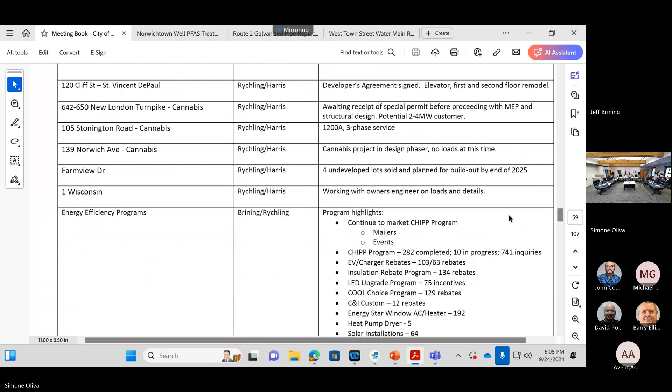Are there any questions or comments concerning the leadership team template? Second. I didn't have any real questions.

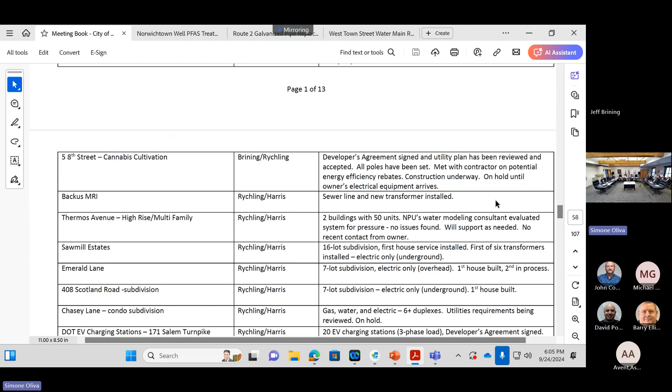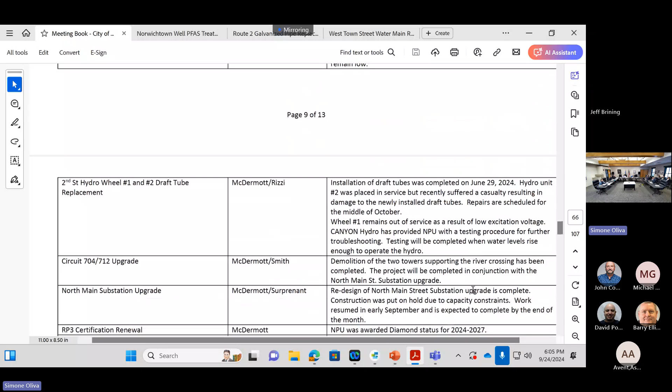I did notice that there were at least 4 or 5 listings under cannabis. Yeah, I thought we had 2 cannabis growers and 1 dispenser. It seems like now it's proliferating. Well, everybody lives on their base. So 8th Street is the one that's the front runner, and they've been waiting for some electric equipment to get started. They were supposed to be started a long time ago. 4th Street kind of went away, now they're back again. We also have somebody looking over at the Nippy's Field area, and somebody looking over at the area near across from the golf course at the driving range. And we've got somebody looking at either Stonington Road or the Aqua Industrial Center. So did you notice on, I thought that one. They're pretty much pulled out of there, but they're looking at relocating in the new business park, north, Aqua Industrial Center.

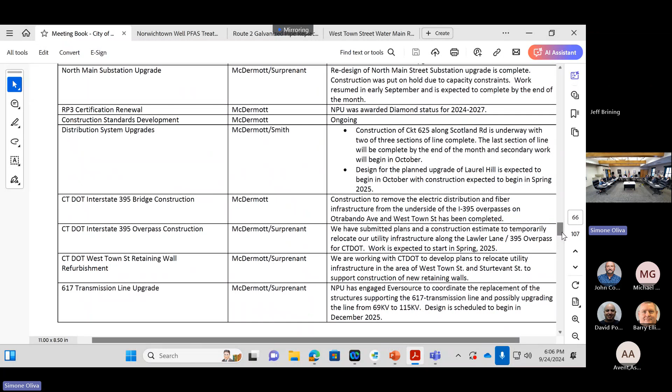And one of the things I was wondering, any updates on the water line extension in Bozrah? I don't know if Larry. So that's where Larry is this evening. Oh, he is, okay. So we were scheduled for 2 different meetings with the Board of Selectmen of Bozrah where I was going to attend. They canceled both those meetings, scheduled a meeting for tonight. So Larry Tag, he's down in Bozrah.

So he'll be discussing the project with them. We're gonna have to get an extension if they don't go to a referendum and approve that project to move forward with drinking water state revolving fund. They also have options of using rural water money to do that as well. So that's where Larry's gonna go, talk about what we need, if they're gonna proceed with us, or if they choose to go with the USDA money, they may be able to get better financing for a longer time, but that's something where they would own the pipe and give it to us after it's paid off for $1. If we get it, we own the pipe. If we get the drinking water state revolving fund, we apply for it, and we have to have an agreement from the town to pay us for it.

Is there a meter installed at the town line, or how is that? For water? Yeah, there would be the water customers would be ours. There would be a meter for sewer that meters the entire town's sewer, because that also captures infiltration or any other issues. So that's why we do it that way. It's different with water and sewer.

And how about Browning Road? That seemed to stop 2 weeks ago. All right, Lisa, do you have an update on the Browning Road water? Only because I drive by there.

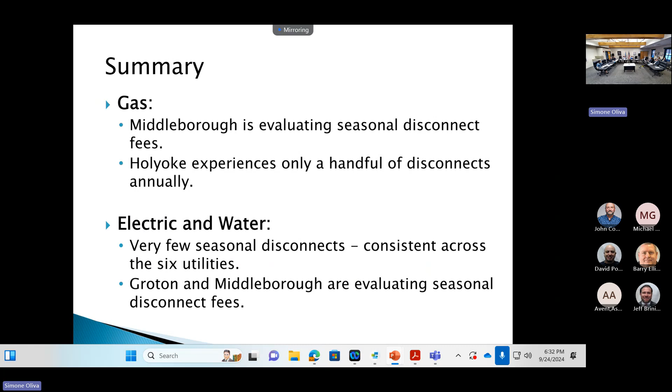So none of the Connecticut utilities have gas? No, apparently Middleborough and Holyoke do. Those are both in Mass though, right? Yeah, there's only 4 municipals in Mass, and the other 2 did not respond when we asked them questions. I called Chicopee - Westfield is Chicopee now. And Wakefield.

What does it cost us on a yearly basis to do this work? I think it was $260,000 a year, with about 600 man-hours. Then the lost revenue is another $250,000 - we haven't even counted that. So it's about $500,000 total financial impact. We just want to discourage customers from doing this.

And in all honesty, on the gas side there's a safety issue as well, making sure everything's right. It's also difficult from a staffing point of view, because the Board of Ed has their own issues going on, and we're trying to pull staff to turn people back on - it creates a lot of overtime and stress.

That's interesting - does the Board of Education shut off their meters? No. A lot of customers need gas for hot water as well as heat, so it's on for the whole year. And when you look at Groton, who is also looking at these charges, they have a lot of summer cottage type issues, which is why they're also looking at it - it impacts them with electric and water turn-offs too.

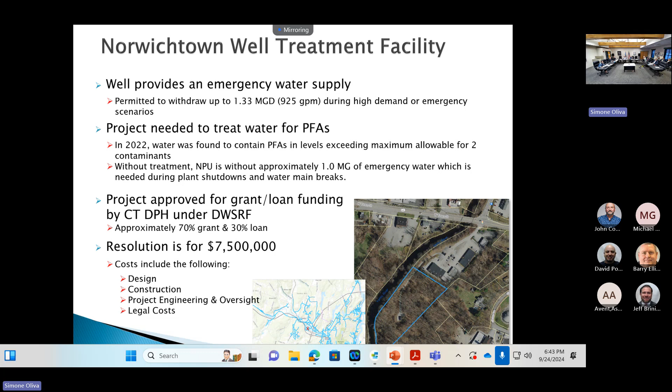Okay, thank you - that's two more, right? Moving on, okay, 2 more to go.

There's pressure issues out there, so we want to add some redundancy into that area. When we try to flush, it ruins the pressure out there. Between like the 1930s to 1950s, 60s-ish, there's a company in Massachusetts that made lead-lined galvanized pipe, and there's no way to find out unless you dig it up. We think that, who knows, but we are in the area where there's a lot of this lead-lined galvanized pipe, so this could be - we'll find out when we dig it up. But we do want to replace that.

It's in Route 2, which is why the cost tends to be a little bit high, it's going down the state right-of-way, but it's not that much pipe. Also, it's a 70%. Yes. And to connect those two pipes would be really helpful for that area, the pressures in that area. Yeah, we did have concerns on fire protection with Stonington Estates when it was built. Yeah. And they actually had a pretty major fire there early on as well.

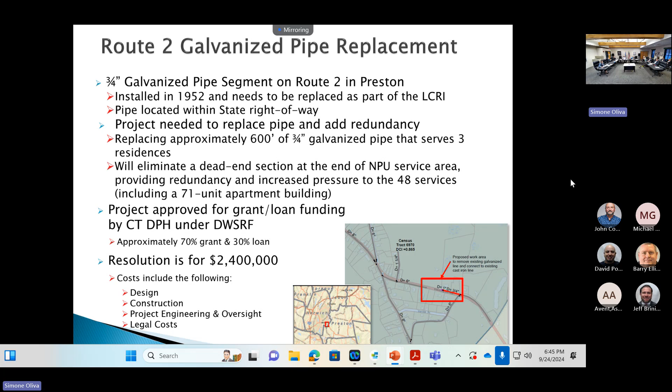Yeah, pressures are low, but they had to have a special system to handle that, and that didn't handle it quite as well as it should have. But this will provide more for fire departments to access that apartment complex. And to loop in on that dead end, because like I said, it's the very end of our system, so to get a loop out there would be helpful for water quality for everybody out there as well. So that's our second one. Any other questions on that? That's good. No, that's good.

And then our last one is West Town Street. There's a 24-inch water main. So our main line that comes in from the plant is 30 inch and it splits to two 24 inches, going sort of under the highway by Otrobando in that area. And there was a failure out there on one of the 24s, and the problem is because of the way the right of way is, the dip and the train tracks, it's about 20 feet underground. And so the only way to really fix that line is to line it, to do a cast in place lining. About 700 feet of lining of that pipe.

And again, just to get some redundancy to fix the pipe that's not working and get the water circulating in that area a little bit. This one's more traditional funding because it's not lead and copper and it's not emerging contaminants. It's just broken pipe. And getting some redundancy back in that system up in that area. And the construction's a little tricky just because it's so deep, we can't do direct 20 feet down. And the reason it wasn't fixed is because it's 20 feet down. So we have capital needs all the time.

Are these expenses, once you include the borrowing costs and the subsidies and all of that sort of thing, anticipated in our budget, or is this new to the budget? And does it affect water rates, all that sort of thing? So Bob, these are in our long-term capital plan. And typically, we wouldn't get these type of projects funded through Drinking Water State Revolving Fund. There's a priority list, and they only fund so many projects per year. With the additional money coming in, we're able to get more funding. That's why we've had all these lead and copper and other projects being able to be done under this loan grant with a high grant percentage program. It's really a great opportunity to do things that we're planning in that 5 to 10 year period, get them done cheaper and over time.

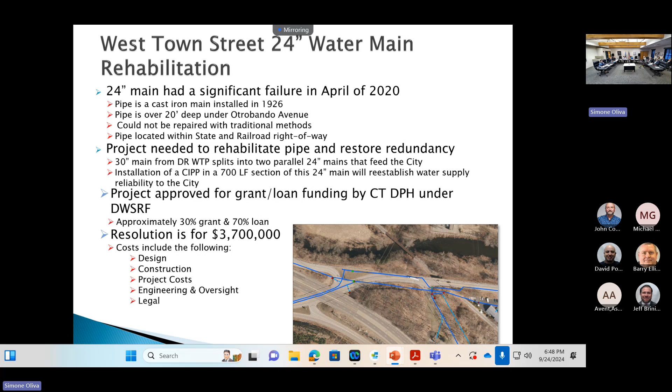But Greenville Dam was constructed in its original location in 1882 to power the Shetucket Company, which was owned by William Green, hence Greenville, who also constructed the Greenville Dam. Now, I say the original location because the original dam was actually located 400 yards upstream and was constructed 50 years previously. If you drive down the street now and look over the river, you can actually see the old dam because the water is so low.

Now, this is a timber crib dam. Timber crib dams were pretty popular back in the 1800s. These dams are designed to be permeable, which is, if you bring me to the next slide, very different from dams that are constructed today, anything you'd see made out of masonry or concrete.

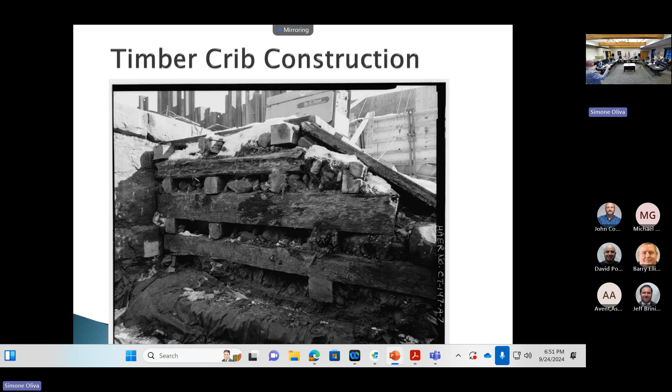Now, because the dam is permeable, this creates different pressures than you would see on a regular dam, primarily upward pressure. So as the water flows through the dam, it actually pushes up on all those timbers and then starts to remove the stone and the gravel. So every year we have to go in and maintain certain sections of that dam that have been removed by the power of the water coming through. Next slide, please.

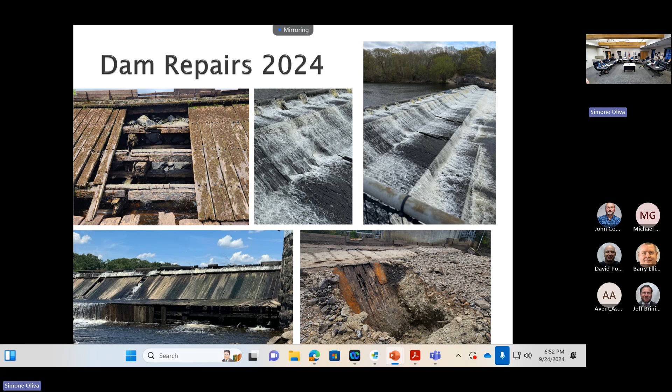Next slide, please. So knowing that we would be facing more damage than we had seen in years prior, and we were not sure how much of a window we would get this year, we teamed up with Mattern earlier than normal to come up with a plan on how we were going to attack it. We first got on the dam in July. We had a 2-week window to get on there and start repairs.

That's where we made repairs to that first section I showed you. If you remember, there was no stone or anything left. So this was that first section completely repaired. And unfortunately, as soon as we got that done, water came back up, and it was about another month before we could get back on the dam. In August, the water finally receded again, and we went to work on the rest of the dam.

The dam is constructed of 3 tiers: the lowest tier, the middle tier, and the upper tier. Most of the damage was to that middle tier, but it also meant that we had to work as we went to be able to drive. Most of the damage was actually down by where the fish lift is, when we accessed the dam from the other side. So we actually had to replace a whole lot of the dam just to get to the area that was most damaged. The area that is most damaged is this area right in here.

So I like this picture because it shows exactly what we're doing here. You can see some of the old timbers left where we've completely cut it out and gone in with all new timbers. We really never know how much damage is underneath until we pull it apart. In this case, we actually had to replace all 3 tiers of that middle tier of the dam in order to backfill it with stone.

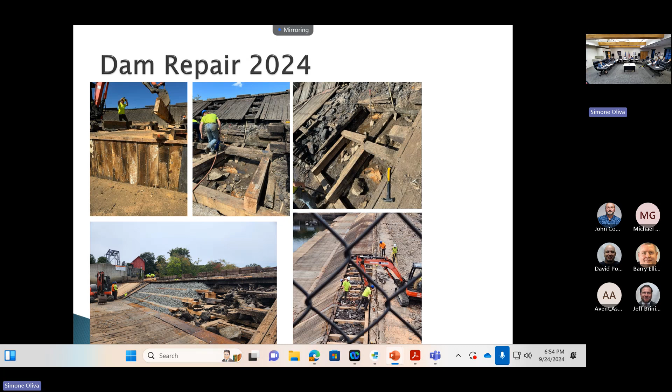So all told, we've been at it for about 6 weeks now. We have made it all the way back to the other side of the dam. You can see where we've made our way all the way back. We are now on the uppermost tier of the dam and filling in that last part. And then if you'll take me to the last slide. So this is the dam after all of our work. I took this today. And you can see that they're still working a little bit down there.

As soon as they finish with this section up here, we're going to replace the uppermost... That's okay. Sorry, I touched it. That's my fault. The uppermost part of the dam here, that should take us about another 3 days. And then we're hoping to be off the dam by the end of the week. With the rain coming, we expect that this will end our window for this year. But a very, very productive year for us, which was needed given the state of the dam that we worked on.

What's the dollar figure on that? So all told, we will probably land right at budget, which was about 250 grand. Normally we spend about 150 grand a year. This year, given the damage that we knew we were going to see, we did increase it to about 250. And based on the invoices we've seen to date, we're probably going to come right in at that figure.

What's that? No, hopefully by the end of this week. We've got rain coming in starting, what's today? Starting Thursday night. And what we expect is that rain will bring the water level up and we won't get back on. We can talk about being careful about any public exposure to this, but would there potentially be an opportunity to do something with the day tomorrow or Thursday? Yeah, absolutely. Okay, it's an urgent matter that maybe gives an opportunity. Yeah, that sounds great. Okay, any other questions? Well, yeah.

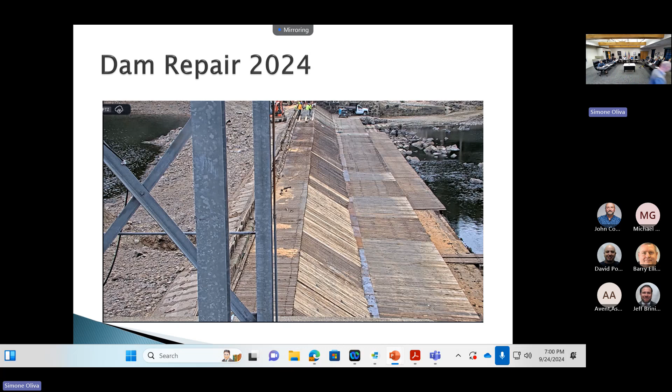All right, okay, thanks everyone. Thanks, Eric. All right, and lastly, we have our favorite discussion typically, the wastewater plant upgrade.

Brad, how do you pronounce your last name? Silent H, just Ross. Okay, that's easy. I can do that.

And Matt is our newest engineer, who we hired on basically to manage this project and do other things. But managing this project is why we hired Matt on, and he's been managing it pretty much from the start of construction. Nice to meet you all, and apologies for the tardiness. We were actually offering a tour of the construction site this evening.

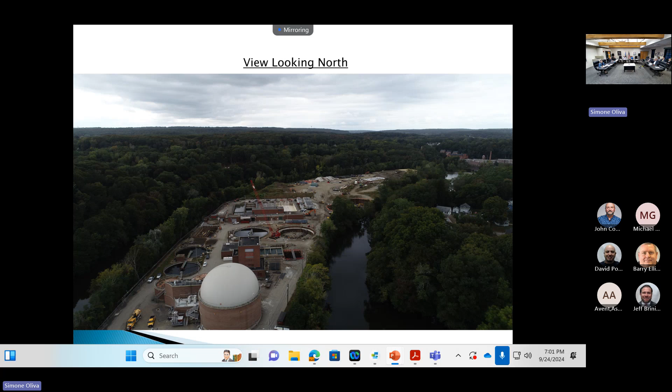You can advance. You're probably gonna ask yourself, these pictures probably don't change month to month, but I promise you there is progress. They're following the format Larry had established. Aerial shot from yesterday, looking north, so this is really the entire treatment plant site. Where I sit most of the day is just at the bottom of the picture. We can advance, we'll see the same view, looking south toward the Thames where the plant discharges to.

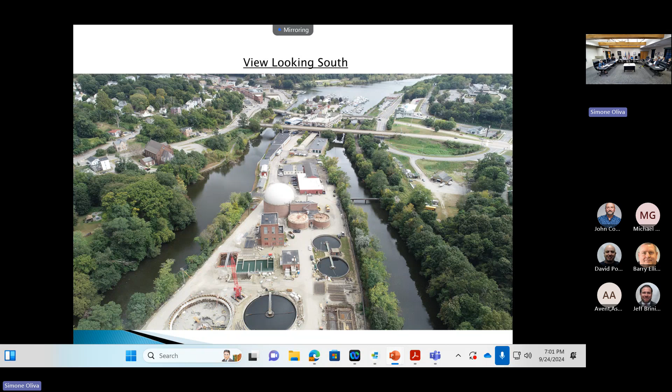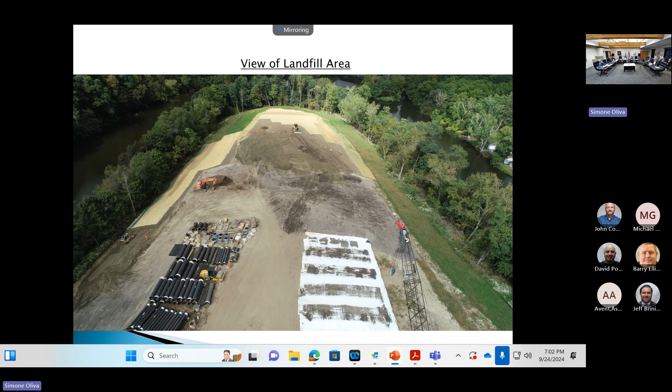If you want to dive in a little further to the next slide, one of the important drivers for the project is to be able to formally close the landfill at the property. This is the very northern tip of Hollyhock Island. Currently there's a lot of lead-contaminated soils being treated at the site and then exported to the landfill along with construction debris. Looking ahead, they're nearing the completion of the first two phases of that work as excavation for most of the ongoing activities finishes.

If you advance to the next slide, we're working through as much of the process flow as we can. This picture probably hasn't changed very much. Our consultant, CDM Smith, has generated a variety of structural repairs. Basically, the contractor had to come in and do a lot of mechanical demolition to rip out the old equipment and give the consultant an opportunity to get eyes on the tank, which they didn't have during design. So there's a series of repairs coming to this tank before any new work really happens.

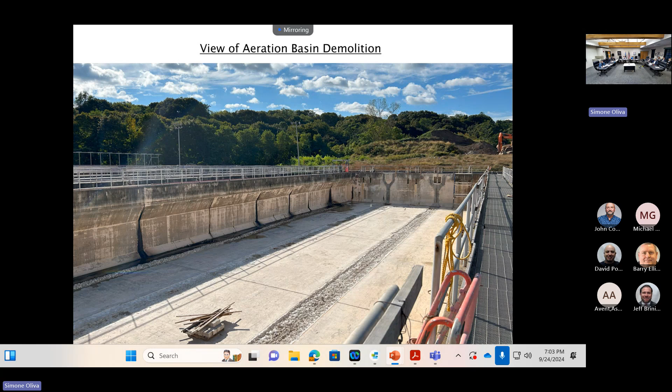We can advance again. Really the critical path for the schedule is building these 3 new clarifiers. They're happening in 2 locations of the site, and that really clears the way so existing clarifiers can be demolished for significant new infrastructure at the head end of the plant.

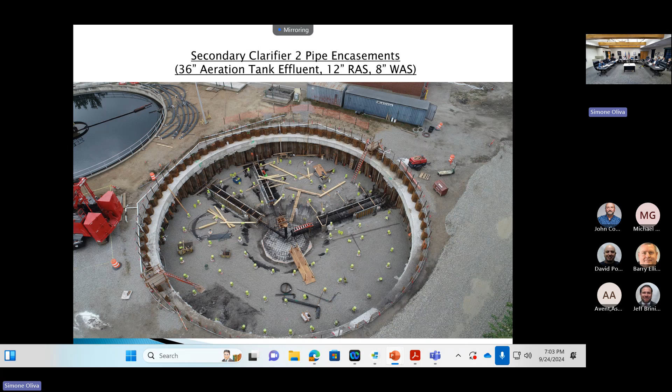If you advance another slide, you'll actually see some real work happening here. So the center well for the clarifiers being formed, that's the steel at the center of the excavation. And then there's 3 pipes that you'll see. They're really going to be encased beneath the clarifier, bringing effluent from the aeration tanks, and then discharging different sludge flows to waste and to return to the head of the aeration basins.

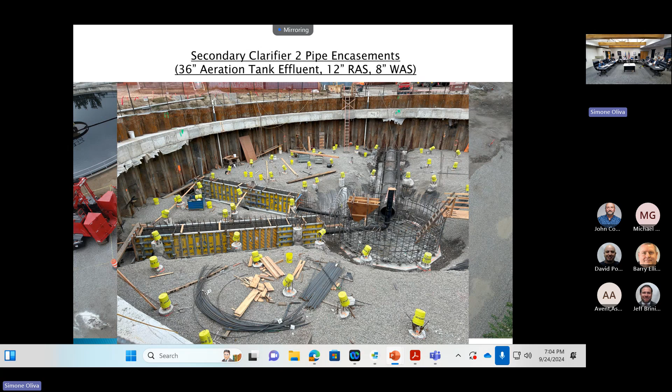And the next slide, actually, we had our first concrete pour this morning. So these 2 smaller pipes in the foreground of the photo were poured this morning. Matt, just for their perspective, how deep and how big a diameter are we talking? Yeah, so the new clarifier, the excavation is beyond 90 feet. The new clarifier itself will have a 90-foot diameter. This vertical dimension here is close to 20 feet.

So, one of the reasons why you probably see slow progress is there's been a lot of significant heavy civil earthwork type activities to be able to put the contractor in a position to actually build something new. So, these steel piles were driven in from grade this summer. You probably saw that progress. And then this concrete ring around the upper perimeter is a sacrificial component, but really just stabilizing that sheeting from caving in, because that sheeting is supporting a lot of earth outside the excavation.

I think if you advance to the next slide, you'll see there's a very significant complex. The pictures don't do it justice, but this is, again, 2 new 90-foot secondary clarifiers, as well as a common pump station for sludge flows. Yeah, you had a question here. What are those yellow buckets covering? Oh, the back ones? Yeah.

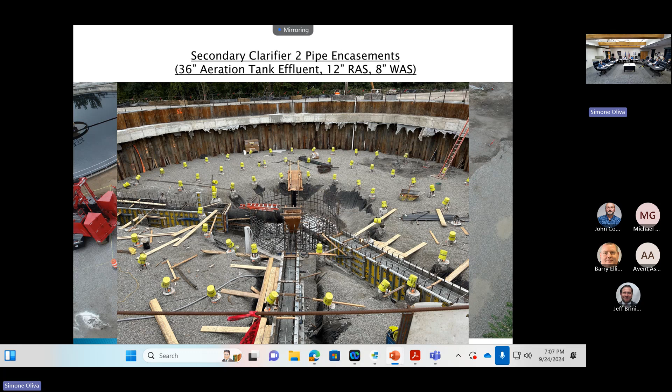You can advance probably one more slide. So this just gives you a perspective. One of the neat aspects of the project is there's, I don't know, 4 or 5 different approaches being used to support the sheeting. In this case, they had actually driven steel tiebacks into the soil outside of the sheeting. So this is again, close to 20 feet deep. It's much different if you actually get eyes on it in person.

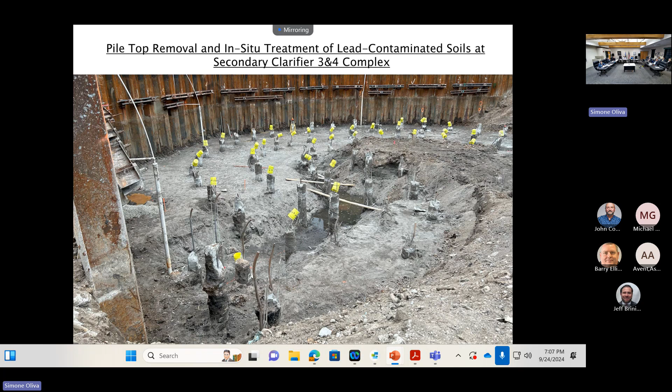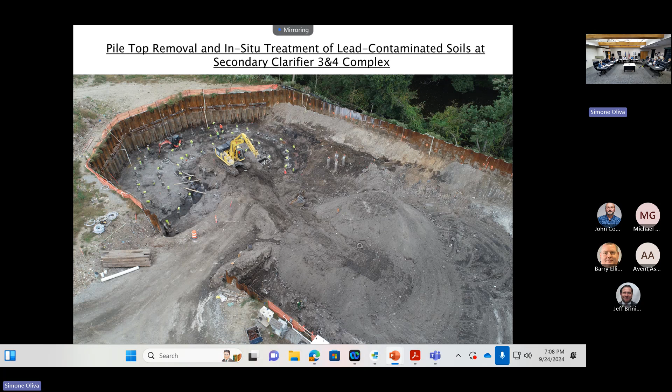But they are essentially treating a significant amount of lead contaminated soil in this location. It's very slow. It's treated in situ. It needs to be sampled to verify that it's been adequately treated, and then they're periodically batching material into the landfill for closure. And then I think there's one more photo, an aerial from yesterday of that entire complex. It's very large. Continuing on to the next slide.

So we're ultimately going to have a new effluent pump station. Essentially a combination of increasing capacity at the plant combined with increasing water surface elevations in the receiving water, the Yantic or Thames River, necessitates that sometimes we won't be able to discharge our effluent by gravity. We'll actually have to pump it. So one of the new structures early in the project is adjacent to our existing chlorine contact tanks, a new effluent pump station for the plant.

That reinforcement bar, they're going to be pouring concrete there. The concrete's going to be that thick? So it's a little deceiving. There's been, I'll say, a snag in approving the concrete mix design for the project. That's put the contractor's reinforcing sub into a position where they're installing; these holes are full of steel. They're at the point, as of yesterday, where they're essentially done tying steel. They need to come in and pour the base slabs and be able to continue working upwards.

So what I'm seeing there is a base plus walls. What you're seeing is the reinforcing for the base slab, and then the reinforcing steel for walls that will come vertically. You're not pouring it 12 feet thick. No. That'd be a lot of concrete. It would.

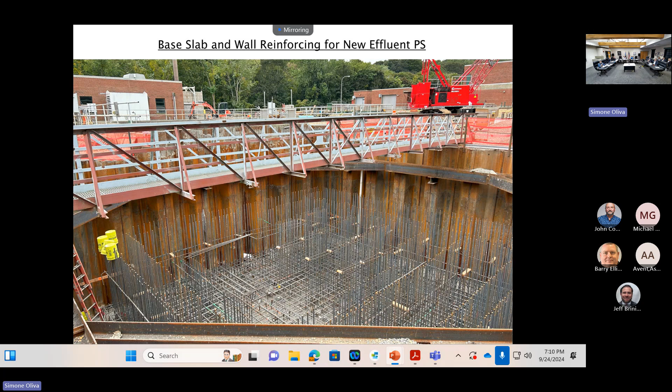Maybe the next slide. One of the other big drivers is the transition in how we're managing sludge at the facility. We will no longer be thickening and digesting that sludge. We'll essentially be only thickening and then storing it for off-site disposal.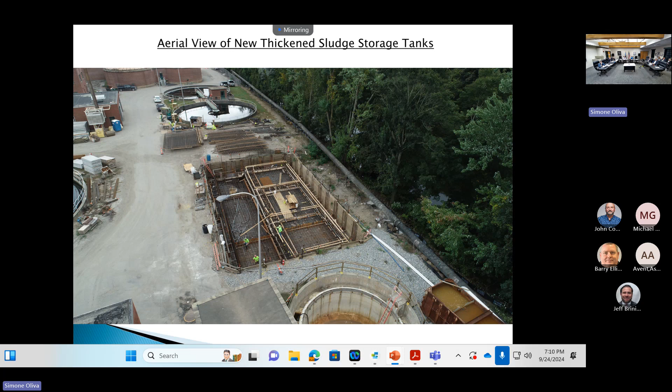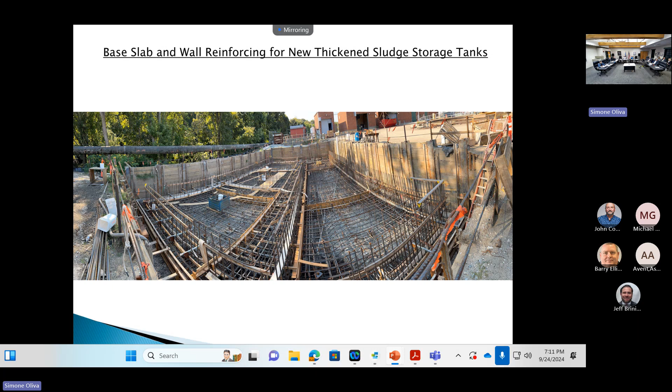Maybe the next slide, so this is just another view of the same structure from ground level. You can continue. I guess a second view and look ahead. So I tried to limit this to 12 months. It's kind of very high level and works through the process flow of the plant, if you think that way like I do.

So for site work, again, they're nearing completion of the first 2 phases of the landfill closure because they'll be done excavating for a period of time. That work will cease before the end of the year, and then you won't see a lot of changes in the landfill until down the road.

There is a small dewatering area our collection systems crew uses to discharge materials from our sewer mains in our collection system. That's being upgraded as part of the project, and that'll be happening second quarter next year. The admin lab building has been significantly delayed.

There's one utility still living in that building, a fiber optic system for plant communications. There's a whole saga about that we could go into, but we are nearing completion, having basically pivoted to an alternate technology. Ideally between Halloween and Thanksgiving, we'll be in a position to begin demolishing that building and then constructing the new admin and lab.

It's kind of a common space. Admin sitting on the existing foundation, lab entirely new. Primary settling tanks.

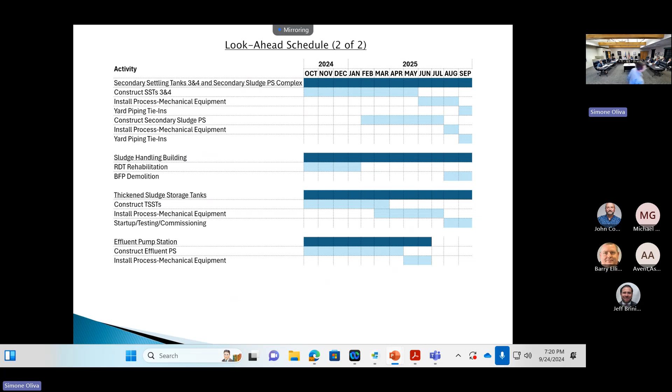All righty, that brings us to agenda item 9. We have five votes to go through tonight based on the presentations and discussions we've had over the last several weeks. For each of these, I'll ask for a first and a second, and then there'll be discussion if any, and then a vote.

So the first one is a vote on the proposed new sewer rates. I will entertain a motion. I'll make that motion. Thanks, Bill. I'll second. Okay, I have a first and a second. Is there any discussion on the proposed new sewer rates? Hearing none, all those in favor say aye. Aye. All those opposed say nay. Are there any abstentions? All right, the motion carries.

Secondly, we have a vote on the efficiency charge that was discussed. I'll entertain a motion.

I'll make a motion to accept the proposed rates. Yep, I'll second it. Thank you, Michael. Thank you, Sean. I have a first and a second.

Is there any discussion on the energy efficiency charge? Is there any way it could be lowered? This is the charge we add for doing rebates, lighting rebates. This is the efficiency charge, not the rate, and not the disconnect or connect charge. No discussion.

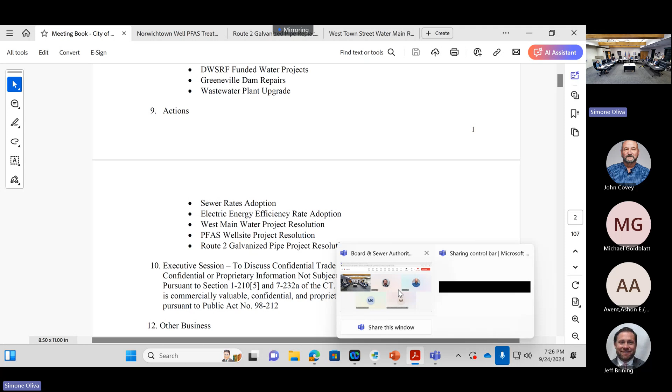Chris, would you like to stay behind? Tonight, I just need Jeff, Steve, and Chris. Okay, well, you can hang for the coming out of the session. Thank you very much. Text me, or... yeah, I'll check on that.

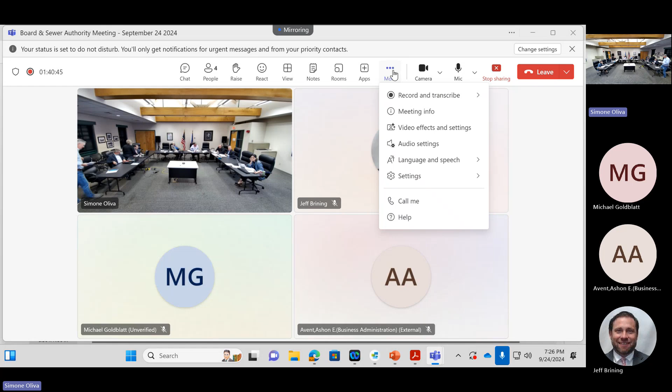And it is my duty to say, for the record, before I turn the mic off here: I have to say we're going into executive session to discuss confidential trade secrets and commercially valuable confidential proprietary information, not subject to inspection or public disclosure pursuant to Section 1-210-5 and 7-232A of the Connecticut General Statutes. This information is commercially valuable, confidential, proprietary, and not subject to public disclosure pursuant to Public Act number 98-212, and also to discuss personnel matters of an employee or employees and/or a public official pursuant to Chapter 14, Section 1-200(6) of the Connecticut General Statutes. And with that, we are in executive session.